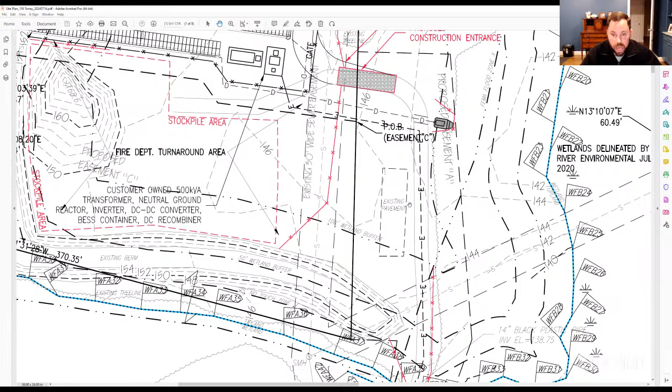I'm sorry, could you just point that out again? So, yeah, right here, this is an existing gravel road, and then it comes through and accesses up here. My understanding is the fire chief would have their equipment back through this area right here, so they would basically back through this existing area into the turnaround area and then be able to reverse and go back and leave through the same way they came.

So there's this existing gravel access drive that comes in from Thorny Lea Terrace, comes down around here, and then follows all the way up here to the access. This area is going to be cleared regardless for the development of the solar field. And now we would just put down a gravel turnaround area right here, and the fire trucks would be able to back in from here and then leave.

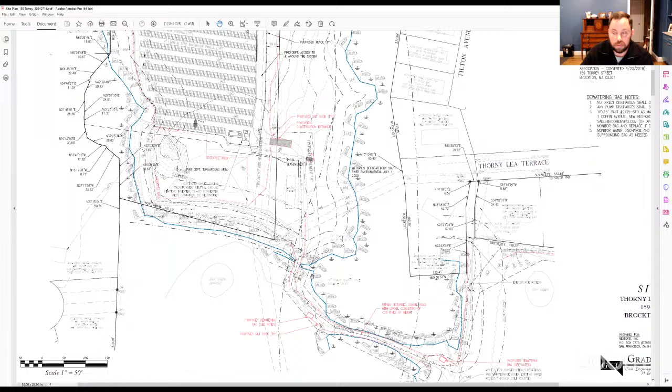And what is the labeling on that other vertical, existing wide sewer easement? Yes, there's an existing 30-foot wide sewer easement that passes through the property from the north to the south.

And is that flush with the surface of where that turnaround area would be? I'm not sure. I haven't been out there, but from what I can see through Google Maps and everything, I do not see that there's anything showing there. Okay.

Kyle, do you have any questions? No questions. No? Nope. Do you feel that the entire turnaround area and access point should be shown on the map as gravelled? Well, I mean, I can get into the agent report if you want. Would you be wanting me to? Okay, sure.

As Mike is aware, they initially filed this with the commission months and months ago. We just had trouble getting it on an agenda. So my agent report was initially dated from November, but nothing's really changed in that report. Ultimately, during the initial review for the initial order of conditions, the commission had their third-party reviewer, the Beta group, review this for compliance with stormwater standards.

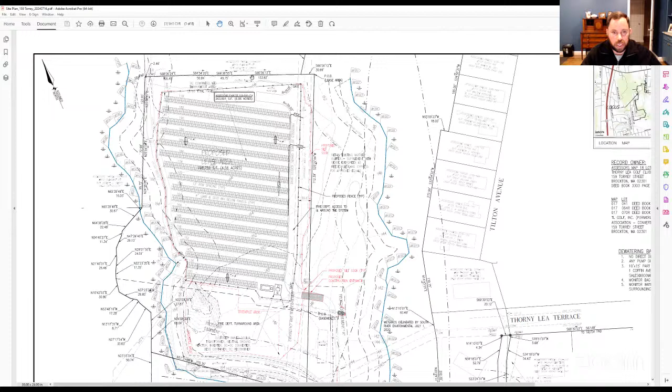I believe so, it's just like a mound - I had a picture. If you look up on Google Earth, this entire area used to be rented to the farm up north, right Gareth? I believe it just looks like there was soil storage in this area, because looking at the pictures there are additional piles of soil.

So would you expect that to all have to be leveled out in order to lay the gravel? I would expect, no. Correct. Although again, as Miss Curtis brought up, good point.

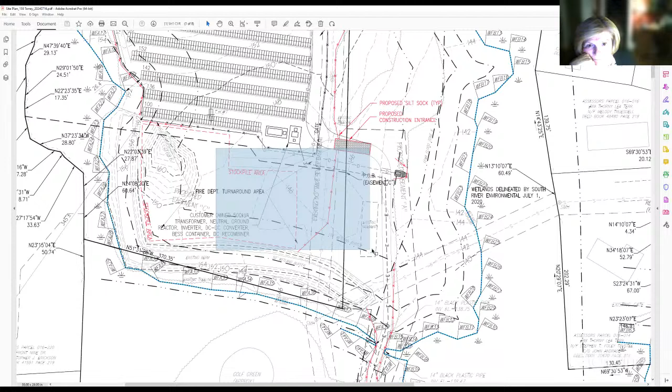If we change the turnaround area to this section here, as long as it's dependent that it's wide enough and long enough for the fire department, in that case we may leave this area as it is, and then it could be seeded with natural grass and be more of a natural environment in that section.

Hi, I actually have a question real quick. So I know once the project is done, this will be the gravel and everything - is it still going to be used for stockpiling during construction for materials? And then it'll be cleaned up. Correct.

So on the map - oh sorry, go ahead - so yes, it'll be used for stockpiling during construction, and then after construction it'll be turned into the gravel road, the turnaround area, yes.

I know we're talking about moving the stockpile area as well as turning it into the turnaround area. But on the original plan, the stockpile area is really big and it goes past, it looks like a little bit past, the 50-foot wetland buffer.

So would you be okay making sure, because originally the plan was to use that whole area for stockpile, so you could in theory use that whole area for stockpile and then change the turnaround area, but would it also be okay to make sure that the layout of the stockpile area is outside, hopefully, the 50-foot and if possible the 100-foot buffer zone as well? Because I think for the stockpile you might hopefully not need that whole area.

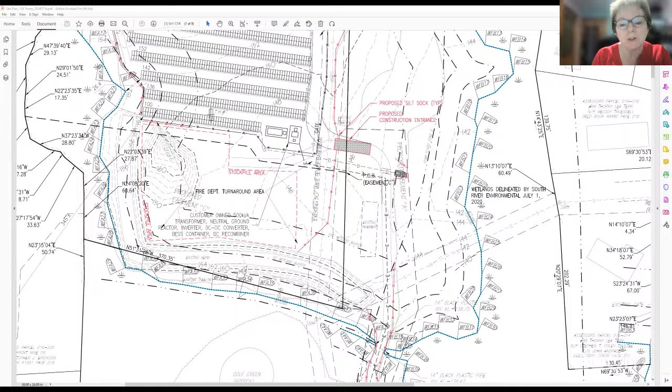I think they're just piles of soil. I was looking on Google Earth, and they just look like piles of dirt, and half of them have, I'd say, grass and weeds growing on top of them.

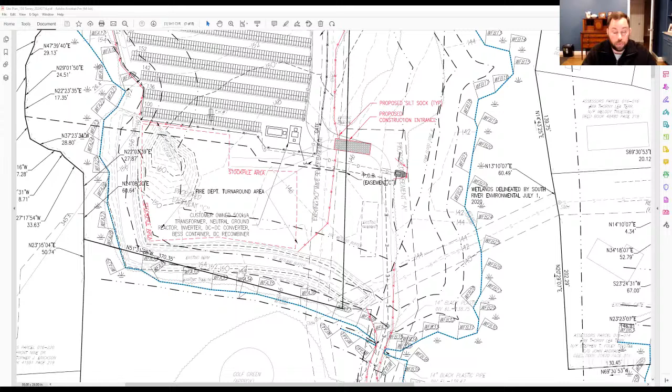Wooded dirt, or is it just leftover dirt from the solar field? We have not touched this property yet. It's still in its existing form as a leftover farm area. So the stockpile area, none of that is from us. I believe it's from Thorny Lea, what they were doing with it. Okay, thank you.

I'm not sure if Gary's farm used pesticides or herbicides or any of that stuff. I don't know. Well, I'm sure they do. It's a golf course, but not back here. No, I mean, this was Gary's Farm before. This was part of Gary's farm beforehand, sure. Yeah.

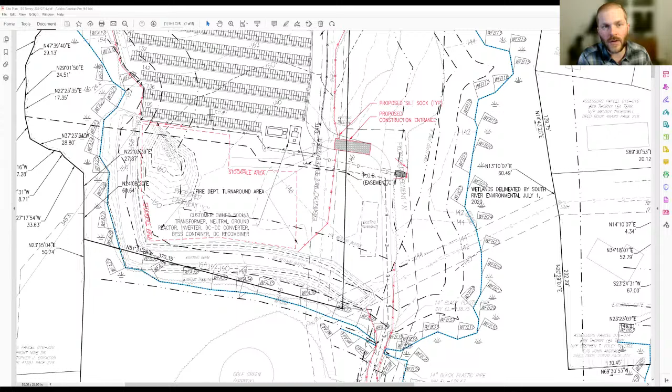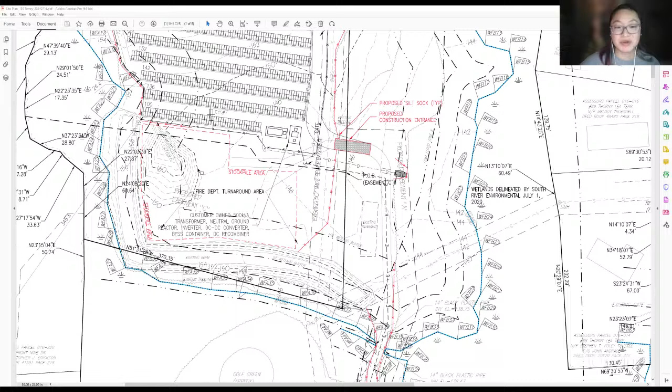Do you, when you're putting in the solar field, are you going to be putting anything in the stockpile as you construct the solar field in addition to whatever's there? I guess to jump off of Peggy's question, if that area is being used to stockpile, what kind of material would you be storing there as you're constructing the solar farm?

We wouldn't be stockpiling stuff. I mean, we would be—my understanding is there'd be some civil work to level out the land, and then we have to put in the piles and the racking for the PVs, the solar array, and then there's the drainage that's already been approved and proposed.

So my understanding is we may have to put some equipment there as it's being used while we're building the array. But we have no plans of stocking any stuff there. As Kyle mentioned, it's for Thorny Lea to continue using as they are currently using it for stockpiling dirt and other materials. Once the system is built, our equipment will be contained within a fence in this area up here.

Any other questions? One quick question, Madam Chair. Mike, when you say equipment, do you mean civil engineer equipment? Do you mean the racking, the bases for the transformer? I'm looking at this, it's a 500 kVA transformer. This is not a solar array, this is a solar field. I mean, this is a big project, right? Just being a dumb electrician, depending on the voltage coming in here, this thing's either gonna do 46,000 amps, 4,600 amps, or 600 amps, and that's power, you know?

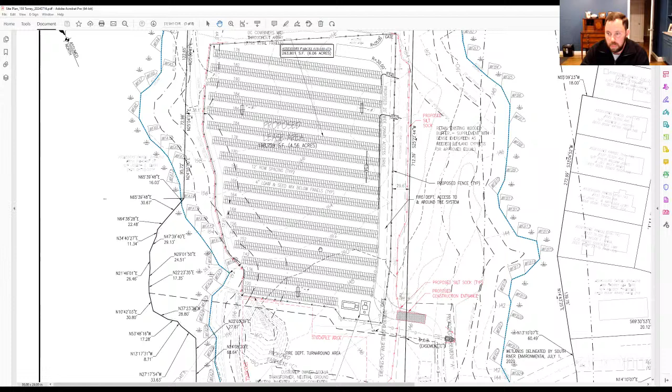So there'd be machinery for doing the civil work that's required, and then there'll be machinery to put in the piles that the racking will be connected to. But no, I don't think we have any plans of storing any type of equipment out here. And then due to how it has to be moved around, it'll come in basically in sections. Sure, thank you. Of course.

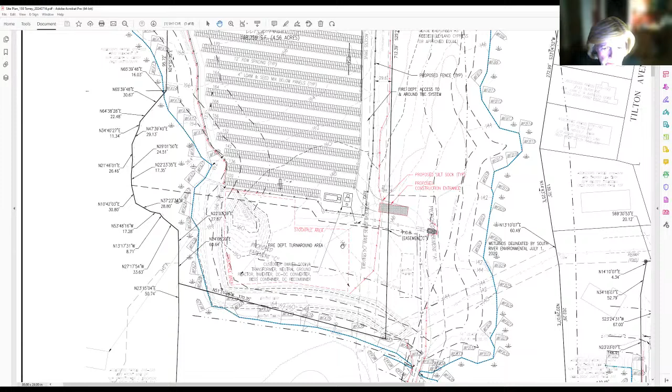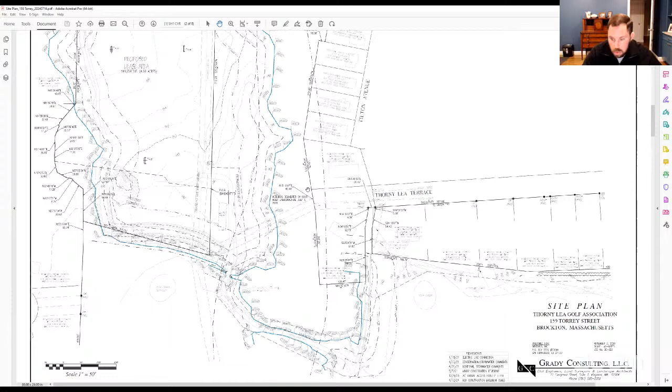I'm sorry, do you have erosion controls in that stockpile area now? Do you have anything indicating on the map where the erosion controls would be? Let's see here, I believe there was. So it looks like there is a drip edge on every single one to prevent any type of runoff from causing erosion. And then the entire thing is also planted with a native wildflower and grass mix to prevent erosion. Every single row has its own, I think they call it a French drain, because it's basically a 3 foot wide by 18-inch deep trench along the drip edge with crushed gravel in it to absorb water and prevent any type of runoff erosion.

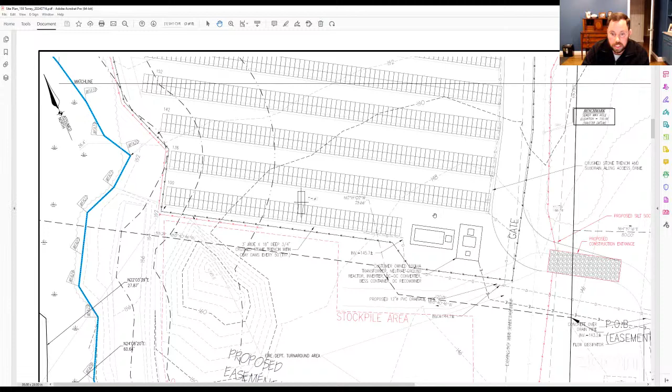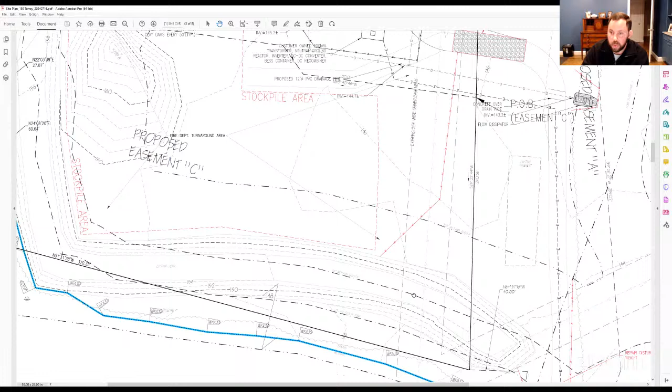I just meant for the construction part, for the construction phase. My understanding is there'll be the usual type of wattle stuff put along all around the edge of the construction, like wattle and fencing to prevent any type of erosion and protect. And also, the existing berms also help severely with preventing any type of erosion. Okay, thank you.

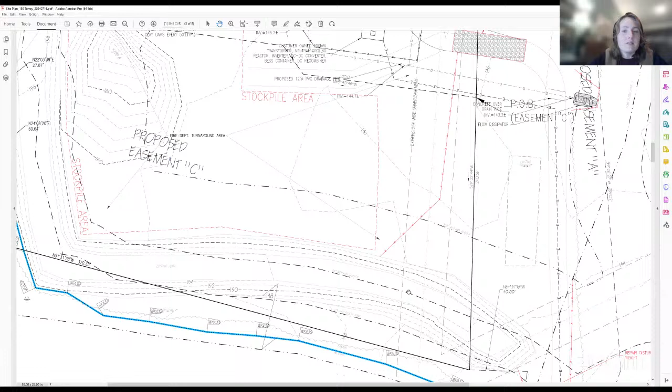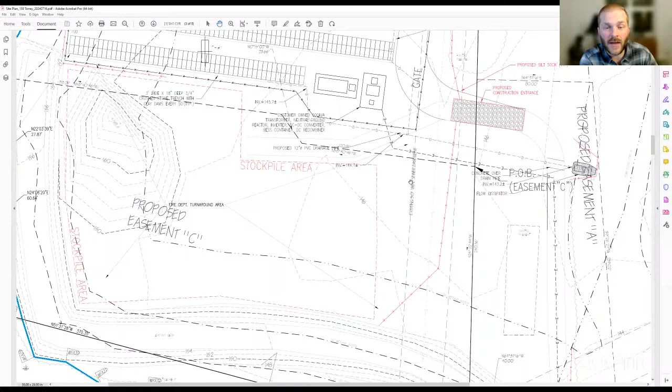Hi, Madam Chair, I just wanted to point out that where there's a red line with little X's, it looks like that's a call out for proposed silt sock. I can't see it labeled on the screen now, but yeah. Right, I didn't see that erosion control around the stockpile area. I only saw the straight little line, and I think the intention, Madam Chair, is that the stockpile has that raised berm around the bottom and to the left side of the screen there. If you look up top next to where the solar field is, there's erosion controls there that terminate on that corner, and then they also pick up down at the bottom of that raised berm. So I think the intention was the berm would collect and funnel any water that's moving through that area through the system as designed and approved. Okay, thank you.

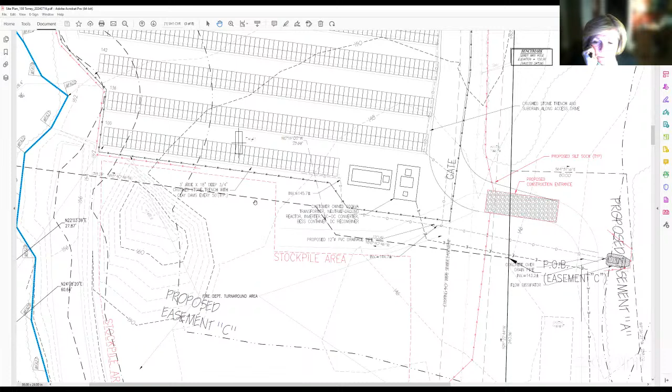Any other questions? I entertain a motion then to continue to the next meeting and refer to third party for review as suggested by the agent. I make a motion to continue 159 Torrey Street with the hope that it will be sent to third party review in the future once that gets figured out.

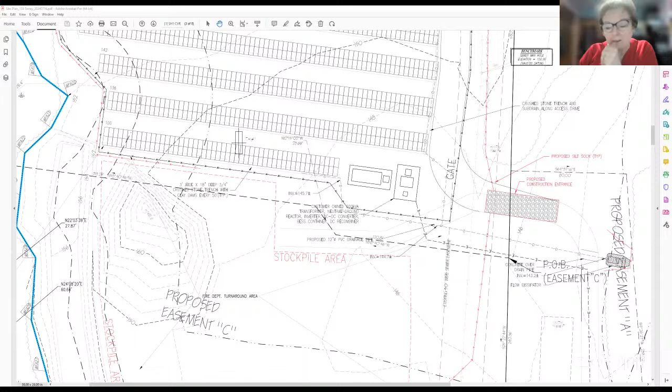I'll second. Okay, motion's been made and seconded to continue to the February meeting with referral for third-party peer review. Roll call vote, please. Curtis, aye. Green, aye. Map, aye. Talbot, aye. And Boris, aye.

That motion passes. Okay, Madam, Chair, just on that third-party review, I had an update today compared to last night when we spoke about it briefly. The mayor did execute that last contract, so all three contracts have been executed. At this point, I need to do some back-end work on our end, but I hope to begin sending out, in the order that we've received them, chunks of projects that need review, hopefully beginning next week.

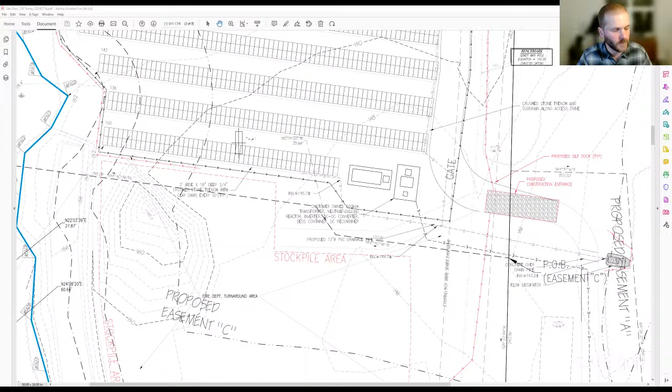I'm sure all of the applicants are happy as well. Well, I haven't told them yet, but it's coming around. So, but yeah, that's been kind of handled. So we're good to move forward with peer reviews. That's great, thank you. Good Chinese New Year gift. Okay, thank you. Thank you very much, appreciate it. Thank you, Ms. Patterson, thanks for sharing. Have a nice evening. You too.

Next item on the agenda is RDA, a request for determination of applicability for 700 Oak Street. That is correct, Madam Chair.

One moment, please. So I spoke with the representative. This is the Walmart Supercenter project. They're doing additional work on the parking lot. They decided to shift the scope of their project last minute after they had submitted materials to the commission. But they've already gone through and done the legal notice you have to put out for an RDA, so that's already been done. They've asked if we could open the hearing tonight and then just continue to next month, so they can supply us with a revised set of plans.

So they won't be speaking. Yeah, they're not planning on attending the meeting tonight. Okay, so they're going to submit a new set of plans for us to review for next month's meeting.

Sure. Okay, then I entertain a motion to continue 700 Oak Street, the request for an RDA, to the February 19th meeting. I make a motion to continue 700 Oak Street to the February 19th meeting. I'll second the motion. A motion's been made and seconded. Roll call vote please. Curtis, aye. Green, aye. Map, aye. Talbot, aye. And Boris, aye. The motion passes, continued.

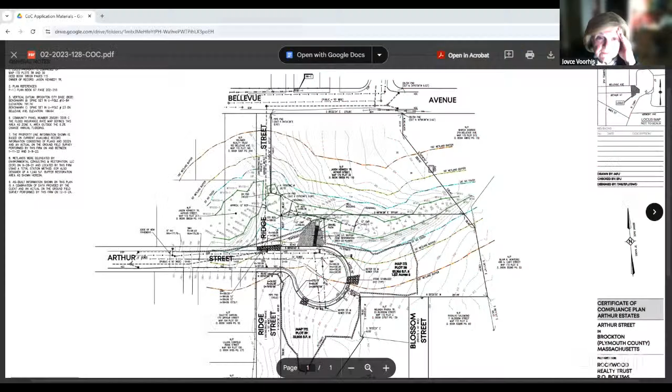The only concern I had about the letter, is that I did receive it, but I received it yesterday at noon time, with a request to forward it on to the commissioners. We had a meeting last night, so I'm not even sure if commissioners had a chance to even look at it. I know that there was a letter, there were some photos, there were the engineer reports and the reports from restoration. Those had been in the file, so I had seen those before. But I don't know if the commissioners had a chance to really look at that. It was received fairly late, and by the time I forwarded them, I have no idea whether or not they were even able to access and take a look at it. And it seemed as though the letter had been written - the date on the letter was the 24th as an email, but I didn't actually receive it as an email until the 28th.

So this is your as-built right now. Arthur Street is going off to the left, is that correct? No, yes, the main part of Arthur Street, yes, we extended it and improved the dead end to a cul-de-sac. Okay.

Kyle, would you want to have some input here? Sure, if we're ready to move on to that. Jason, do you guys have anything else to say before I go on my little tangent? I'm sure we will, Kyle.

So because we've complied, and I know you stated there was erosion from the grass strip going into the stones we had at the end, which also helps erosion, we addressed that yesterday in pictures to the commission. We installed erosion control blankets around the entire cul-de-sac circle, even though it was really just that one area you had the picture in.

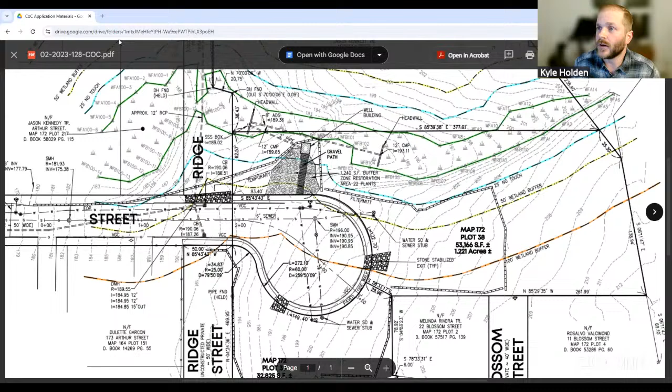All right, so I guess I'm just going to take a step back and kind of talk through the process of how things are normally done here, so everyone's aware. Generally speaking, when the commissioner receives it, I'm going to end sharing the screen, if we're done looking at this map for the moment. One second, let me put this up.

So when we receive a request for certificate of compliance, generally speaking, that's submitted to the commission, there's a submittal deadline, so the commission has time to review the submitted materials. I received their request on, I think it was the 8th of January. Went out to the site, did a site visit, which is required. Wrote up an agent report, sent that out to the commission, and sent that also to the applicant as a courtesy so they can be prepared to know what will be discussed at the meeting, which is tonight.

In the meantime, the applicant has gone on and done changes to the site. I've not had a chance to go out there and visit in the meantime because, as mentioned before, that was submitted to the commission at like noon yesterday. So my recommendations in the agent report are not necessarily accurate anymore. That being said...

I don't necessarily have a firm recommendation to give to the commission. The applicant is saying they're in compliance. I had issues with the erosion control, or some erosion that was on site, and some other things, and we can go through that in a moment. But as far as if things have been addressed or not...

Generally, Jason and Andrew, the meeting like tonight would be where we would discuss with the applicant what needs to be done to bring the site up to the point where the commission would be comfortable granting that certificate of compliance request. I'd still like to have that discussion with you gentlemen this evening. But that's just kind of how generally the process works.

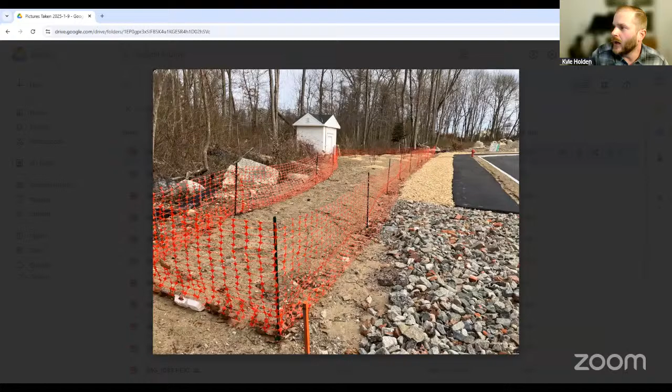I'm just going to flip through some more photos here. This area in the construction fenced area is the buffer zone restoration. This is one of the photos I included in my agent report. You can see the sidewalk here in the middle. To the left is that grassed area, or it's been seeded, I think, but it was just a dirt area. You can see there's erosion here.

Again, this is on the 9th. I'm not saying it's still happening now, but it's very clear there was erosion happening on this side of the sidewalk. The other thing I noted is there's mulch over here to the right side of the sidewalk, and I think that was used to temporarily address the erosion that was happening as things were moving down.

And Jason, you'll have your moment here. I'll let you speak in a second.

In my agent report, I wanted the commission to discuss with the applicants the nature of this mulch area and that stone down there, because neither was included on the plan of record. If the intention is that those are permanent features, that can be discussed tonight. The efficacy of mulching this area permanently is potentially questionable. I've got concerns about that, but we can talk to the applicant.

Ultimately, my report's initial recommendation was to not grant this request for certificate of compliance because the site hasn't been permanently stabilized, which is the verbiage used in the order of conditions. This is just a bad time of year to try to stabilize a site, since it's the middle of winter, and generally you stabilize things permanently with substantial vegetative growth, and things aren't growing in December. So ultimately, I'd like to see some grass growing here.

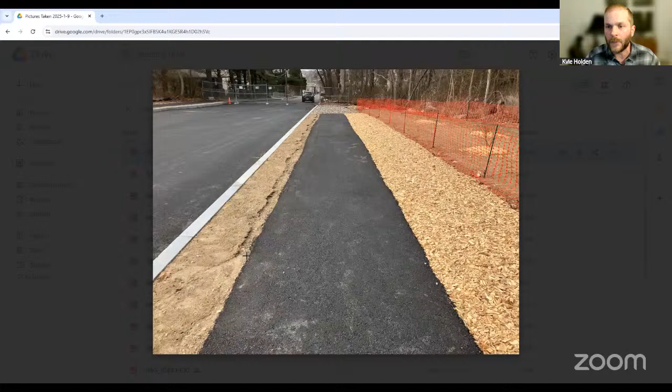But at a minimum, I think the commission should discuss with the applicants whether this mulch is intended to be there forever, or if this is going to be planted with grass later, or what the intention is of this mulched area. Ultimately, the commission and the applicants need to agree on what is deemed permanently stabilized, and whether the commission is comfortable with the addition of the stone and/or mulch as permanent features. That's something we can address in the request for certificate of compliance, as well as a modification to the approved order of conditions.

That's all that I've got for now, Madam Chair. Thank you. Okay, thank you.

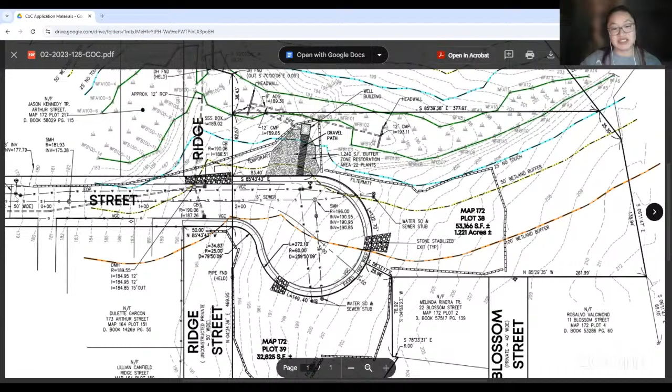So I guess my question is, if that red fencing is kind of helping to protect the buffer zone area, why is that area that's under the mulch not actually part of the buffer zone area now? Or, like, if what you look here — why is there space between the sidewalk and the zone?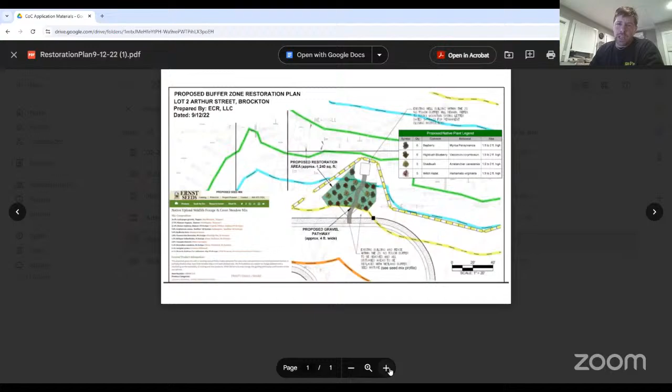So if you look at the proposed restoration area from Brad Holmes from ECR, it actually really just follows that 25 foot — oh no, I'm sorry, that's the 50 foot, I apologize, the 25 to 50 foot area — it follows that line. We just extended it a little bit further to the back of the sidewalk as part of the cleanup effort.

So in reality, does the zone go all the way up, or does it just go up to that area? I guess what I'm trying to figure out is, in real life versus on the as-built, because there's clearly that space where the mulch is. So I guess one thing would be to fix that a bit so we can see there's a definitive space where there's no restoration.

Well, I think it doesn't denote material type on the as-built. It certainly has been restored all the way to the back of the sidewalk, and it doesn't show, for instance, that we put wood chip mulch around all of the plantings to help protect them — it doesn't show that on the as-built either. It's more that's the general area that was restored and corrected, and it does carry up to the back of the sidewalk.

So in the as-built, there are some little symbols denoting the bayberry and different shrubs used that go all the way up to the sidewalk. But because there's that mulch there, I'm going to assume there's not really going to be any growth of those shrubs right where that mulch is. So I guess there is, to me, a bit of a difference between using the mulch as erosion control versus where there's shrubbery and green vegetation we're assuming is going to go in spring and summer once it gets warm. I'm confused by that statement.

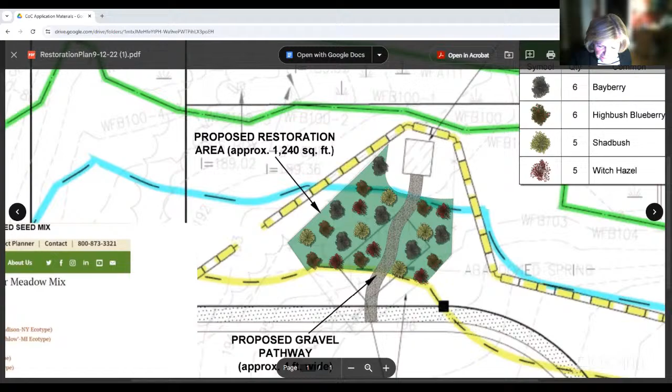Kyle, I do have a quick question. Can you explain what it means to fully comply with an executed release agreement? Does that have to do with the original?

So the commission issued an enforcement order last year, mainly for that sediment transport down to Arthur Street. There were some other issues that were brought up and that were also part of that enforcement order.

The executed release agreement was what the council, the applicant, and the city of Brockton agreed upon. I signed on behalf of the commission, and Mr. Kennedy and Mr. Spath both signed representing this development. That was basically an agreement between both parties on what work should be done to remedy all the issues raised in that enforcement order, all of it, with the exception of one thing.

I don't know, Jason or Andrew, I'm not sure if you guys have done this yet, but I spoke to the city's attorney today, who talked to your attorney and mentioned that you had been planning on moving that sign. This is a small detail, not something that would warrant any sort of enforcement action on its own, but it was tacked on with the other issues - the DEP file number sign.

We agreed in the executed release agreement to move the DEP file number sign for lot 2 up near where the sign for the roadway extension DEP file number is, so it was visible by the road. Again, a small detail, but that was technically something included in the executed release agreement that hadn't been addressed when I was out on the site on the 9th.

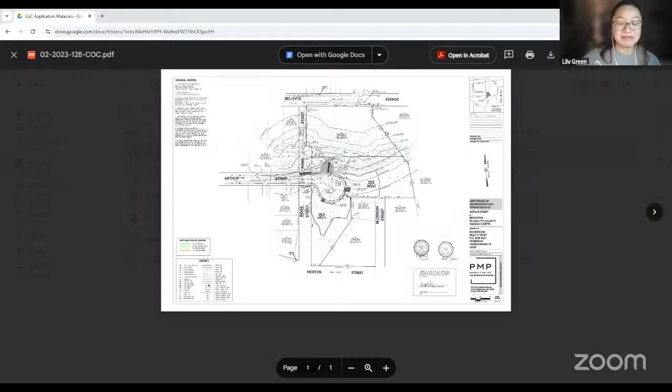Hello, back to the mulch area. Could you please bring up the as-built plan again? Zoom in as much as possible, thank you. Whatever we decide for the mulch area, I think it's important for the as-built plan, whether it's for the extension and the lot, to have it reflected, whatever we decide, whether it's to keep it as mulch. So you said it's kind of around the 50 buffer zone, which I'm guessing is that yellow dotted dashed line.

Yeah, that kind of yellow curved line, that's correct, the 50. And then it goes a bit beyond that, I guess, just to get a more accurate looking visual of it, because how it's shown right now, if someone was to look at it, they would assume there should be shrubs there, and then when they see it's just mulch, that might cause a problem in the future, maybe.

But whether or not we keep it as wood chip mulch, or if we decide we want to seed sod grass or something, I'm not really sure what other options there are that get brought up. But I think it would be important because right now it isn't distinguished as being different from that red netting fence.

So the temporary construction fence does go around part of that, right? Is that what you're saying? Well, wait, hold on, can I annotate on here?

So where the 50-foot buffer zone is, and maybe what they said a bit extended beyond that, where the buffer restoration is, in reality doesn't go all the way up to where the sidewalk is labeled. And that area right now on the map is showing that it does go up there, but that's not really accurate, because right now it's just that strip of wood chips acting as an erosion protection kind of thing. So I'm just saying at some point, whether we keep it as mulch or decide we want something else, it should be distinguished as that, so it's accurate to the plan.

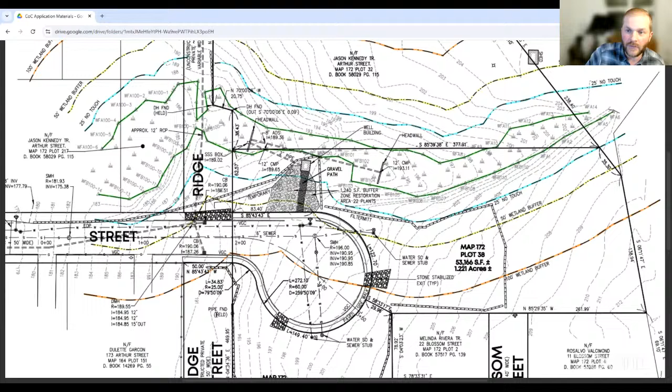Kyle, is it typical to actually show what the substance is that's within those zones on the as-built? Or I just mean showing that that's not part of the buffer, because it looks like it's just part of the restoration plan. Yeah, I think the problem we're talking around here is that the as-built doesn't accurately represent the ground conditions as far as the installation of that mulch strip. That's not included here, and it shows that's actually part of the buffer zone restoration, when in reality the buffer zone restoration doesn't extend that close to the sidewalk, and so that's the issue here.

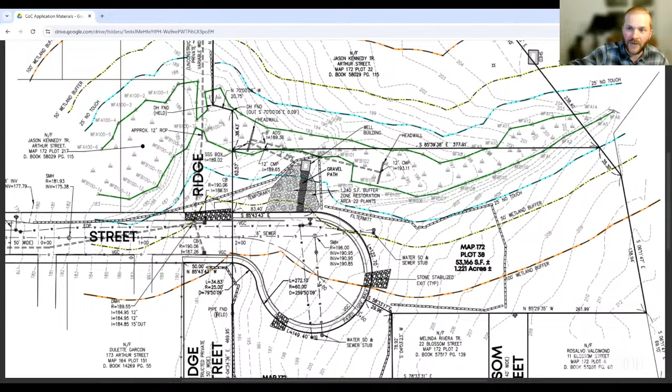A potential modification to this plan could include that mulch strip. That wouldn't be a problem, but the question is whether the commission wants the as-built to include that mulch strip as a permanent feature. We haven't determined that yet, so I'd recommend the commission decide if that mulch area will constitute a permanently stabilized area, or if you want some other treatment. If the commission decides not to grant the certificate of compliance tonight, they could later modify the as-built to accurately represent that area, because currently it's not representing the ground truth of that portion of the site.

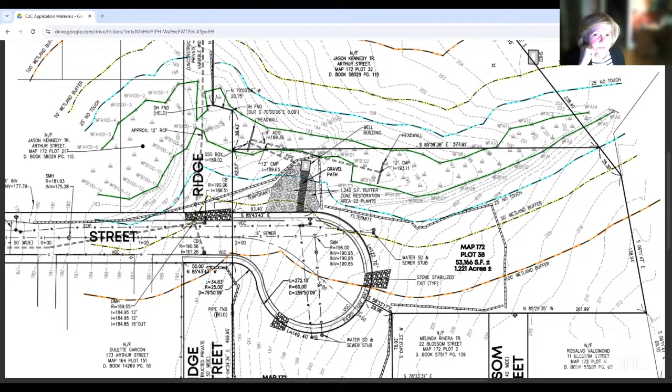Mr. Kennedy, is that your hand raised? I just wanted to comment.

First of all, we didn't put that there as erosion control. I just thought it would look nice, and it's not mulch, which I stated in that letter—it's actually wood chips, which is a 100% natural product. There was a space between the buffer zone and the sidewalk, and it looked unfinished, so I thought, let's put in something natural there. It's perfectly legal to put in any resource area, it's what happens when you cut down a tree. It also does happen to stabilize it, which we didn't have erosion, but it looks nice having that there. I did it as an extra step, just like the construction fence around the buffer zone restoration area was an extra step to protect it. I don't think there's any issue with this. In the agent's report, there was zero runoff of the wood chips, so I don't see why that would be considered an issue.

Just like Andrew mentioned, any project you approve within 100 feet, those projects have mulch beds, and I'm sure there's no requirement for those to be not a mulch bed, or some other product. So I just did it as an extra step, and I thought it was a benefit to the site.

So just to be clear, I know we're talking about this for 45 minutes. No, we just need to finish up. I thought it was the right step. We need to finish up.

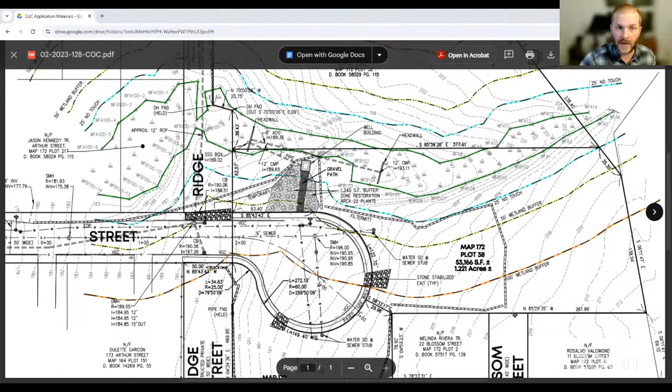But the grass hasn't done anything yet. It was already seeded, I believe - Andrew or Jason, correct me here. What you've done is the area around there was already seeded, and you came and put that straw mesh netting on top of that. Is that a correct description of the activity you've done? Correct. It will stabilize it until the dormant seed germinates and grows through, and the netting or matting degrades.

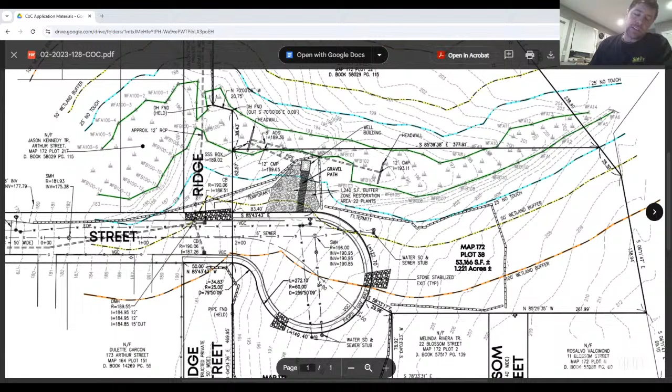Yes. Now, have you hired a landscaper or lawn company to come and reseed that and take care of that?

Is that part of your responsibilities as the developer? Not at this particular point. Obviously we'll be at the site doing some of our own work on the homes, but this just becomes a grass strip that you'd see in any neighborhood, where typically the homeowner maintains the strip in front of their property regardless of ownership, right?

I grew up in a house that had a grass strip, and the sale agreement is made with the owner stating this is a protected area that needs to be seeded and maintained. As part of that order of conditions there would be ongoing maintenance, so the homeowner will be aware. So that means your responsibility after the home is sold is no longer your responsibility - it's the homeowner's responsibility, is that correct? Yes, that's correct.

The issue I have with the mulch area is that usually when you mulch, you lay down black netting or matting so weeds don't come up through it, and I understand that it does deteriorate over time.

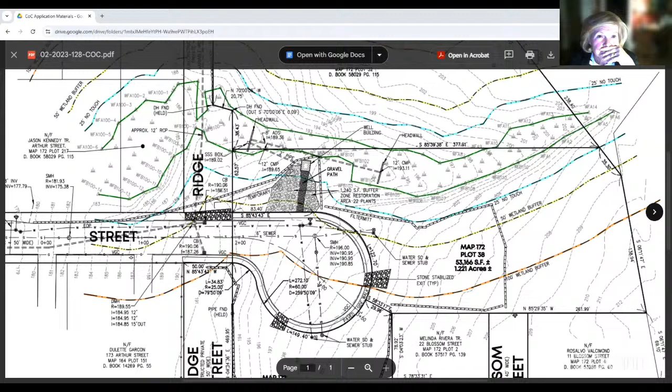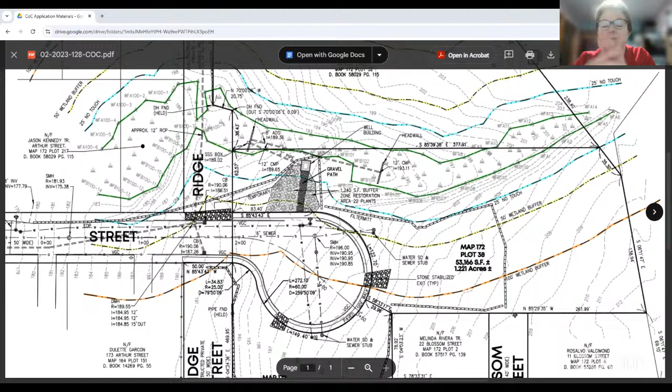Kyle's issue is that it's not permanently stabilized. Is it also part of the homeowner's agreement to stabilize that area once the mulch deteriorates, or is there something you can do now, like plant - I don't know, you can't plant bulbs or grass right now - but the homeowner may change that because it's their land at that point, right? They may want to put something else down there, is that correct? That's correct.

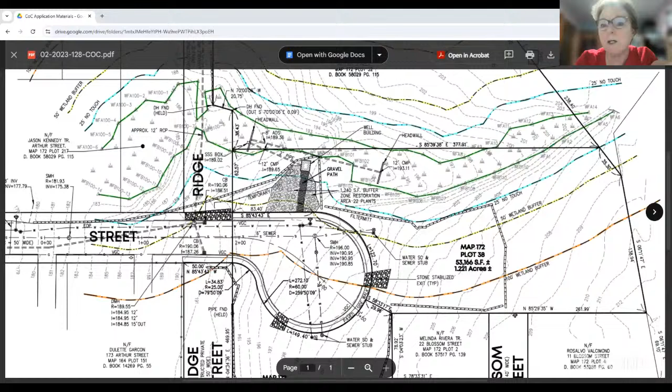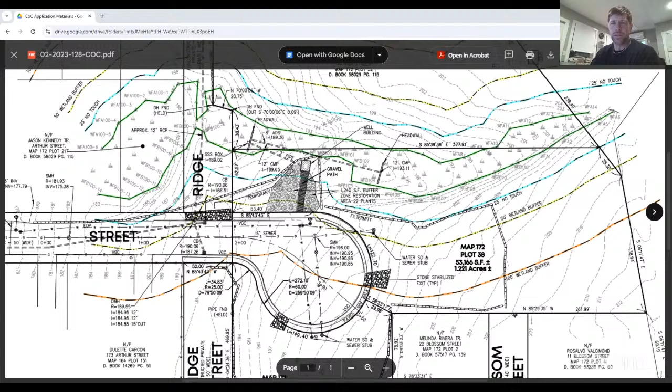That is part of lot two. If I could share my screen again - I can't with Kyle's up there. I just wanted to point something out. This is the property across from where that wetlands line comes closest to Arthur Street, and if you'll notice in front of their house they have a few shrubs with some mulch. They're clearly, by our own plans, within the 50 to 100 foot buffer, and it's on the same grade, on the hill of Arthur Street.

I think we've gotten caught up in the minutia of the mulch, and it seems this was not what the commission expected, so it caught them by surprise, and with short notice as well. Well, if I could say it was only short notice because we got short notice, and everything kind of rolled downhill. We didn't anticipate by any means that we'd be talking about wood chips for 45 minutes, but here we are.

Here we are, we really do need to move on. So commissioners, I guess the bottom line is: what would it take to get an approval tonight, what would make the commission comfortable with an approval tonight, knowing we still have lot two, and the majority of what we're discussing is part of that parcel. I personally do not consider wood chips a permanent solution to erosion control.

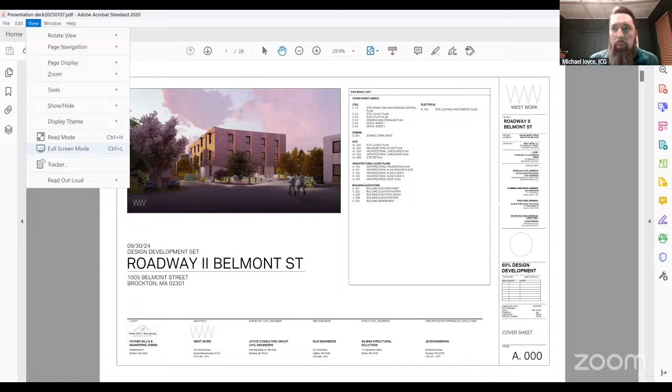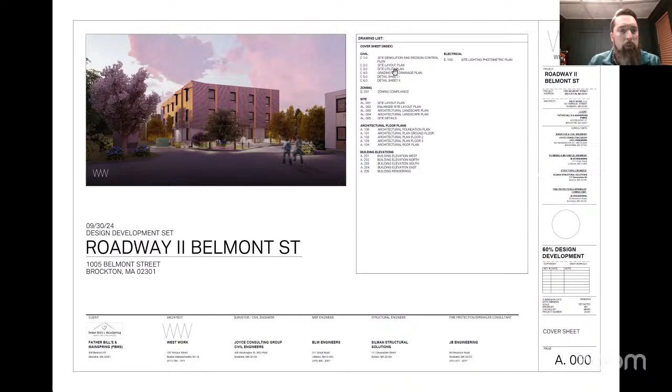Let's see here. So, this is 1005 Belmont Street. We were here quite a few months ago. We've been going through a review with Beta, and in the same breath, we've also been going through with planning. We actually recently, earlier this month, received approval from the planning board, and that was after he met and spoken with Beta. So this project is at 1005 Belmont Street. Just to refresh your memory, it's where the roadway apartments are. This is roadway apartments two, roadway two. It's going to be a 29 unit building with office below.

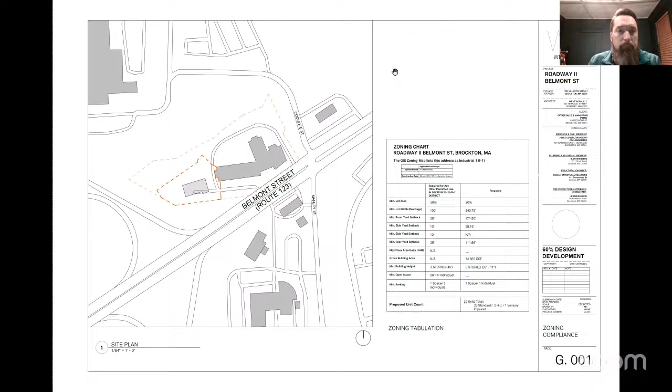This kind of shows you a locus of where the proposed building is in relation to the existing building. Along Belmont Street to the west is the on-ramp to Route 24, and diagonally across the street would be the VA hospital. Here's another aerial view showing you the location of the proposed building. It's in the area of that proposed asphalt.

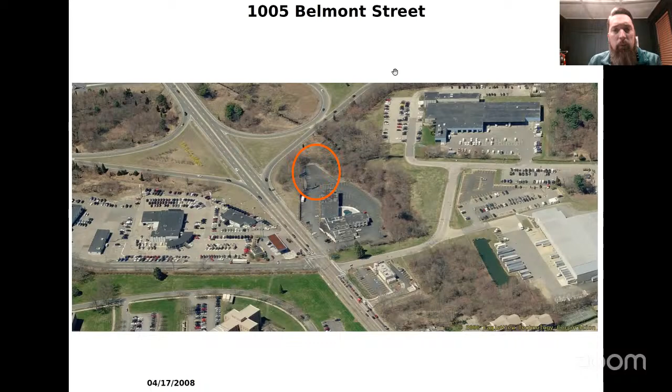When we first met, we had a building footprint that went over the edge of the asphalt. We whittled that down - I think it was 31 units with some office space, went down to 29 units. This is another view of the existing parking area where the proposed building would go. This is the existing site plan. So it's a 3.25 acre site. There's a brook to the rear with an associated floodplain and bordering vegetated wetland.

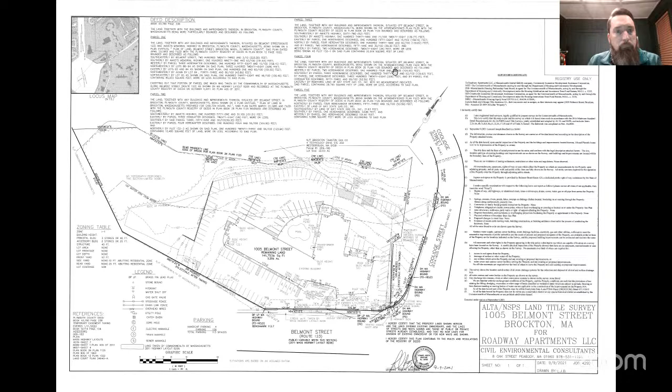Since you've seen the project last, the things we've really done: we've added some fencing on this plan here, in this area here, and at the top of the stairs here. That fencing is just going to say something to the extent of environmentally sensitive area, emergency access only, and that would restrict access to that 25-foot buffer.

Overall, as a result of the project, we'd be removing approximately 7,500 square feet of impervious area from within the 100-foot buffer.

We also added some scour protection to the outlets. That was one of the comments from Beta. They had a whole list of comments. The major things that changed were the scour protection at the outlets.

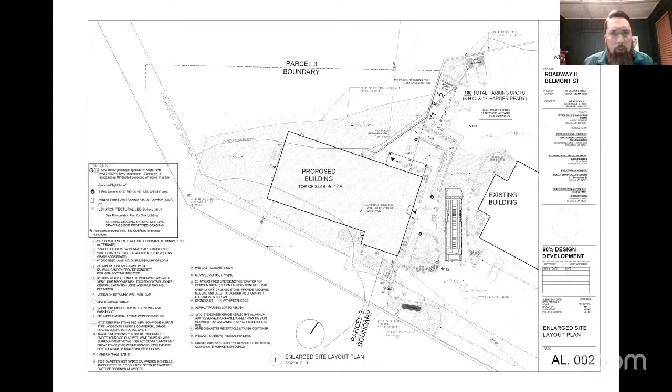They have a little planting plan here as well that the architect put together for the plants in this area. And like I said, the New England wetland mix will be in the hatched area below.

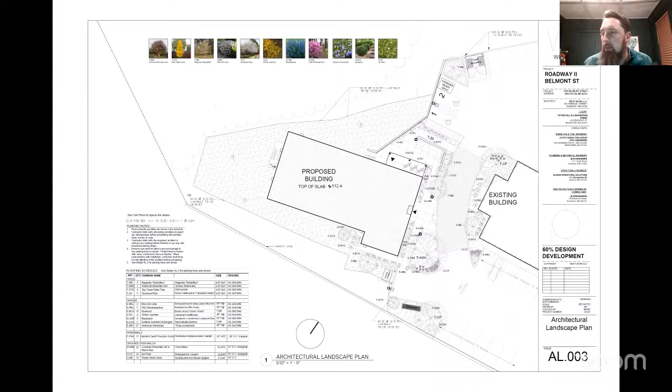So those are kind of the main changes from what we had originally proposed and what we saw going through with Beta. I'm happy to answer any questions you might have.

Kyle, do you have anything to add? No, but Elyse is online here tonight from Beta to answer any questions the commission has concerning this project.

Before I open it up to the commissioners, Elyse, do you have any comments? Michael did a great job just summarizing. Essentially the last bits of the Beta stormwater review were what was holding things up a little bit, and the concerns we had about meeting the maximum extent practicable, any changes that could be made were made. That had to do with raising the height of the infiltration system to have a little bit more separation.

So that was resolved, and ultimately what it boiled down to as far as administrative items for the commission is a few things. First, the commission just needs to approve buffer zone restoration within that 25-foot no-touch zone, as well as approval of the markers being proposed, and make sure the commission is comfortable with how it's being proposed.

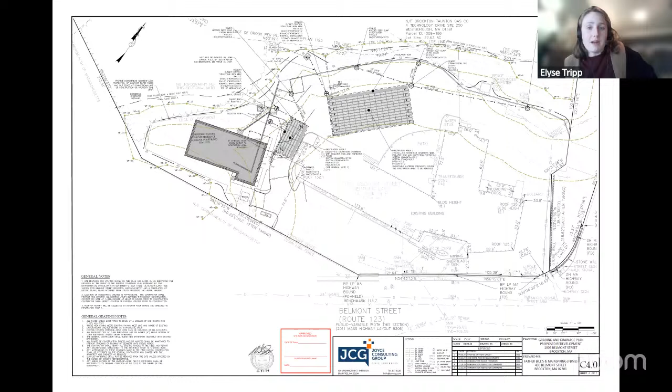And the last item was whether the commission wanted to see plantings within that 25-foot restoration area, or if they were content with the seed mix that was proposed. So that's the last little bits of items we had that won't hold anything up - it's just basically up to the commission. I'd be happy to answer any other questions, but otherwise I'll defer to the commission.

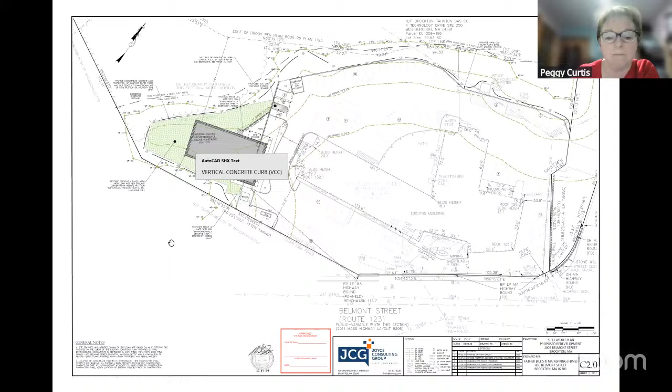Because I know Elyse mentioned it, does the commission, because usually we have markers along the 25 foot. I know it's deep within, with a seed mix, so it's not really tall shrubbery, but would there still be a need for the commission? I guess should we still mark off the 25 foot for the future, or just for extra, if someone is back there, at least trying to prevent them from going into the 25 foot. My understanding is we've had that as a requirement for individual homes because they get sold and change ownership. I'm not sure, Kyle, what do you think about markers at the 25?

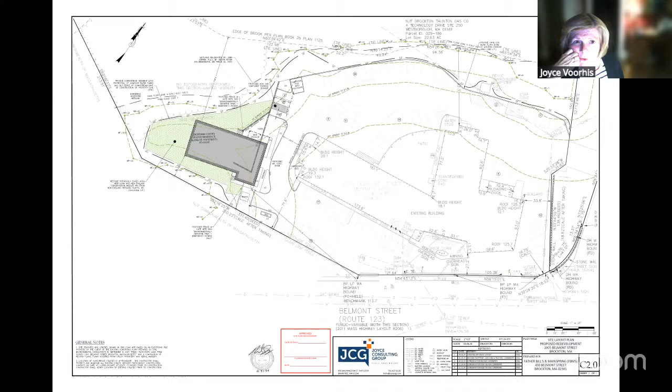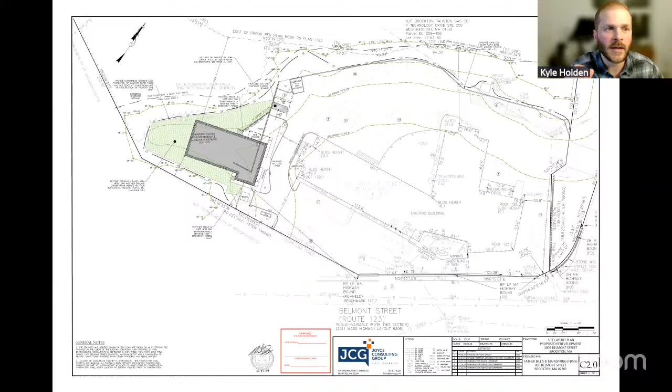Thank you, Madam Chair. That was also what my question was. With the 25-foot buffer zone as is, I don't know that makes a lot of sense. I think there might be a better way to phrase this, to limit that area, designate it as kind of a conservation area.

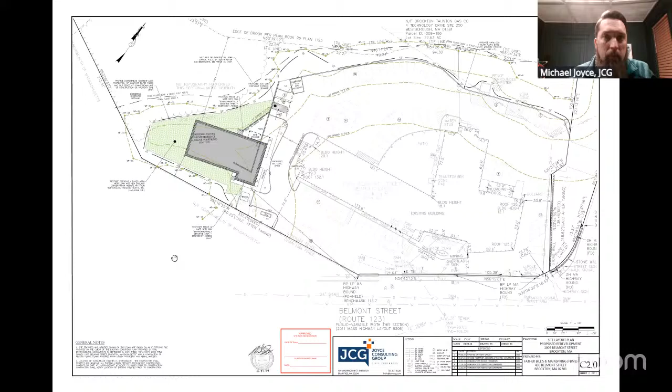So in Beta's report, it mentions that their permanent markers consist of a fence and a gate. Mike, can you show us where that fence and gate would be on the plan, please? Yeah, I might have to zoom out a little bit.

Could I just ask, if we have to put signs there, I'd greatly prefer to say conservation area rather than environmentally sensitive. We have people with mental illness and they're gonna think it's contaminated. Yeah, that's on me, I was technical with it, but conservation's fine. I think people understand what that means, the conservation area is probably better.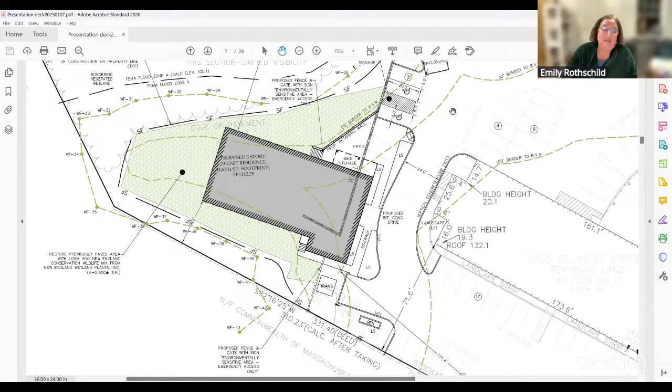But the gate was proposed at the top of the stairs here, and then the fence is shown just at the back of the transformer. And this is the 25-foot buffer here.

We could put a sign on the gate on the fence there by the transformer, and then there's the proposed fencing gate on the north side of the building that we could put.

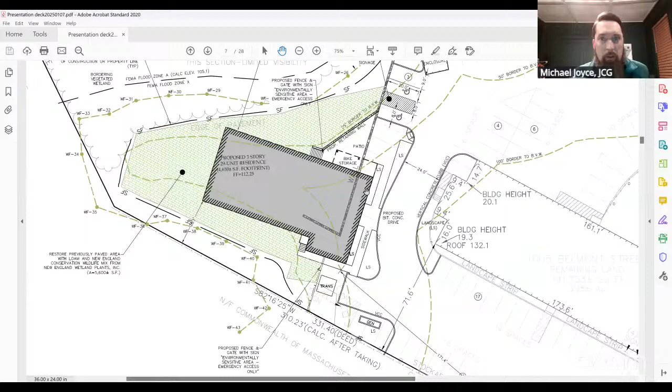Is there a fence or anything halting anyone from jumping over that retaining wall, or is that an 8-foot wall? What's the height of that? I think it's gonna be similar to the height of the wall that's there now. Let me pop to the grading plan and I can tell you exactly what it is. It's about a 5-foot wall.

So yeah, the elevation at the bottom is gonna be 106 and the elevation at the top's 110, 111. And that will be a new wall that you're building, correct? Yeah, it's gonna be new wall, this is the existing wall here. The plan right now is to cut it and then build a new wall. That leg there will be new, yes.

Well, would it be possible to put some sort of post in the new portion of the wall that could have a sign, for our signage for the commission, because all of that area is kind of within that 25 foot, right? If we could put some sort of signage at the top of that retaining wall, by the gate and by the fence, and basically the rest of that back there is kind of contained within the 25 or the area that we've replanted.

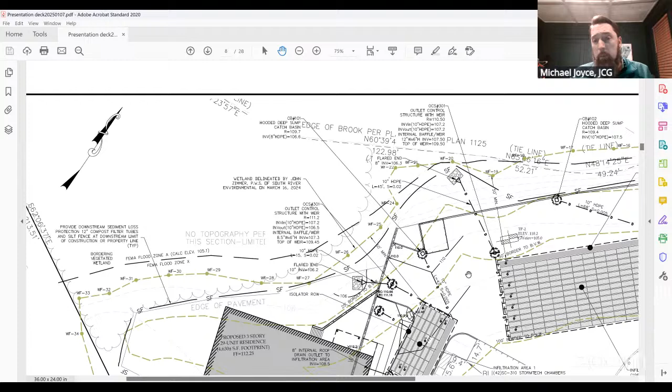Sure, yeah, I think we're willing to put signs, coordinate with you. There may even be, I'm not sure what that wall looks like, there may even be a little fence on the top of it where we could mount it right to that fence. Yeah, great.

I mean, that would be what I would recommend, is we'll draw a line along that wall, and then the fence on the south side of the building and put the signage around there, and then we wouldn't have to worry about it all along the 25 foot.

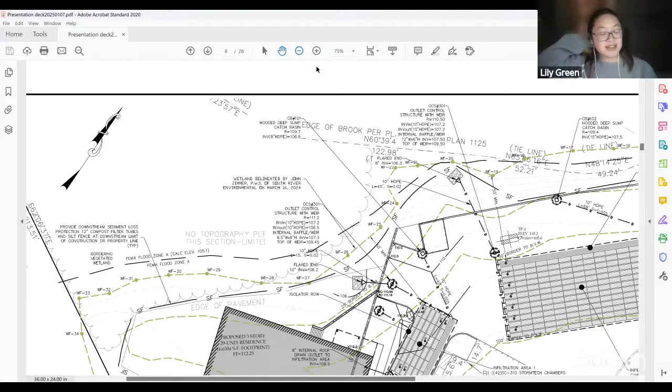I'm tired, I think I forgot where the emergency exit was. I was for some reason thinking it was like way back in the building, but it doesn't look like this. Emily, what was the terminology you suggested? Conservation area.

We're just trying to preserve a nice natural area instead of environmentally sensitive, where people are thinking there's something poisonous back there.

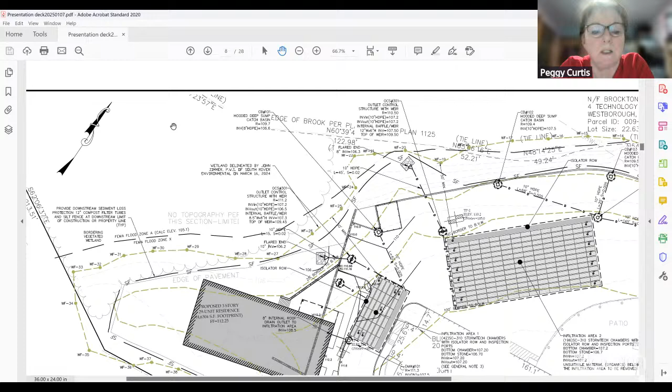Will there be any mowing or pesticide use in the back area there behind that building? No, we didn't have any intention of doing that. At the most, for the conservation area, maybe do like spring and fall just to, but that would be up to the commission as well. But we weren't intending on maintaining it outside of putting the wetland mix in, the buffer mix.

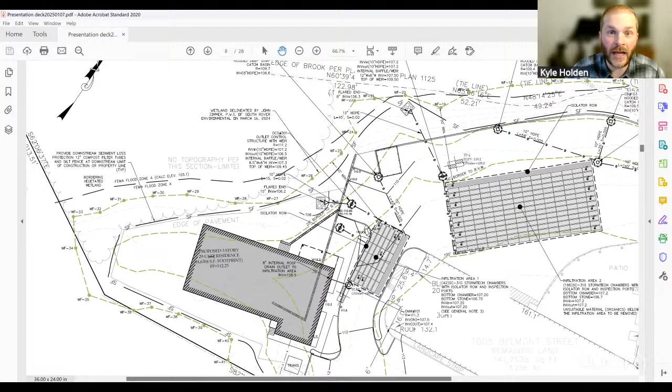Will the emergency exits have an alarm? So if someone goes out that door, will it set off an alarm for the building? They will, yep. I don't think there's going to be a lot of random use of those doors if they're alarmed. They really try to control it to one or two exits, so I think it's the front exit and the patio exit that would be used. Okay, that makes sense then.

Are they allowed smoking? Is there a smoking area? Outside the building, somewhere around the patio that's far enough away from the door. Not inside the building. Thank you.

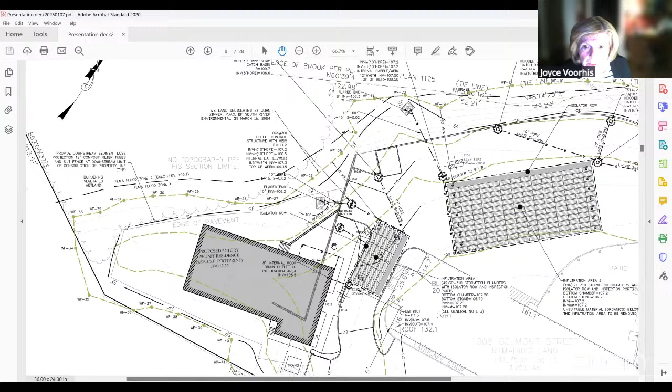Thank you. Justin or Sharifa, do you have any questions or comments? No, I think Madam Chair, this is great, and I love the artist rendition, that looks great. I make a motion to close if possible.

Okay, motion has been made to close. Second? Oh, I think Lily has a question. I just wanted to, sorry, I know it's a long night, I think I might be missing notes for some reason.

The other special condition was making sure the stockpile and staging area is surrounded by supplemental erosion control. Was that mentioned, what that supplemental erosion control was, or did I miss it? So we revised our demolition plan to show compost socks around the stockpile and staging areas as well. Okay, thank you.

So I believe there's been a motion to close from Justin. Is there a second? Second. Motion's been made and seconded to close the hearing on 1005 Belmont Street. Roll call vote please. Curtis, aye. Green, aye. Map, aye. Talbot, aye. Morris, aye. That passes. A motion to, what are we doing?

Issue an order of conditions for 1005 Belmont Street.